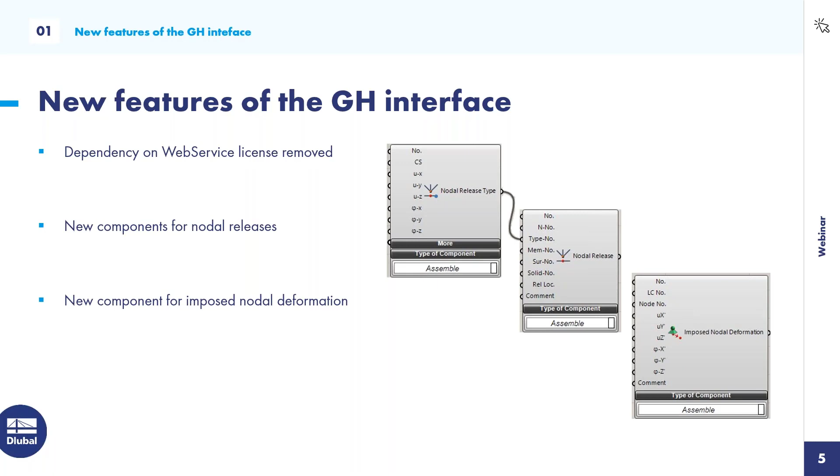What are the new features that we implemented since the last webinar mid-February? A quite important one is we got rid of the dependency on the web service licenses. You no longer need this license to use the Grasshopper interface or Rhino Grasshopper interface. We implemented new components for nodal releases and also a new component for imposed nodal deformations, both requested from our customers.

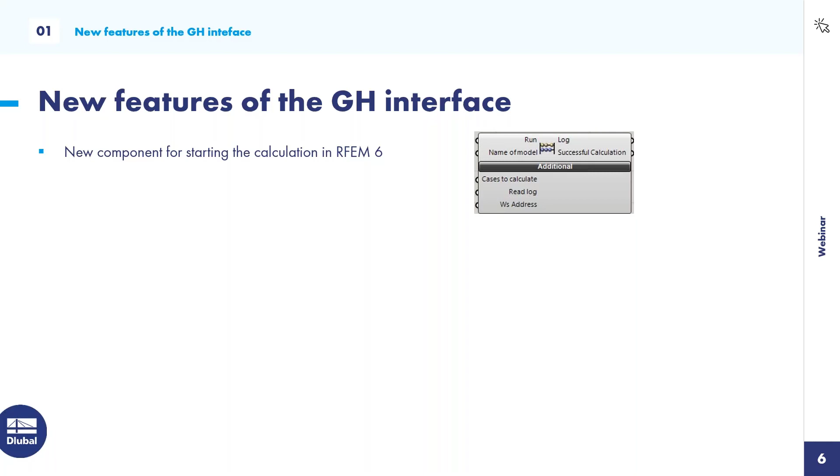Additionally, we created a new component for starting the calculation in RFEM 6. On top of that, also a new component for exporting the results from RFEM to a CSV or XML file. I will mention those two add-ons later in chapter 5. And additionally, we extended the static analysis settings component with the number of iterations, the load increments, and the form finding iterations.

Last two changes, we extended the surface component. You can now control the local axis system as well as the integrated objects via the new inputs here. And we also extended the member component with a simple function, the member rotation via surface. These are the latest developments, and that's already chapter 1. Let's go into chapter 2, where I want to show you how you can use RFEM objects when exporting from Grasshopper to RFEM.

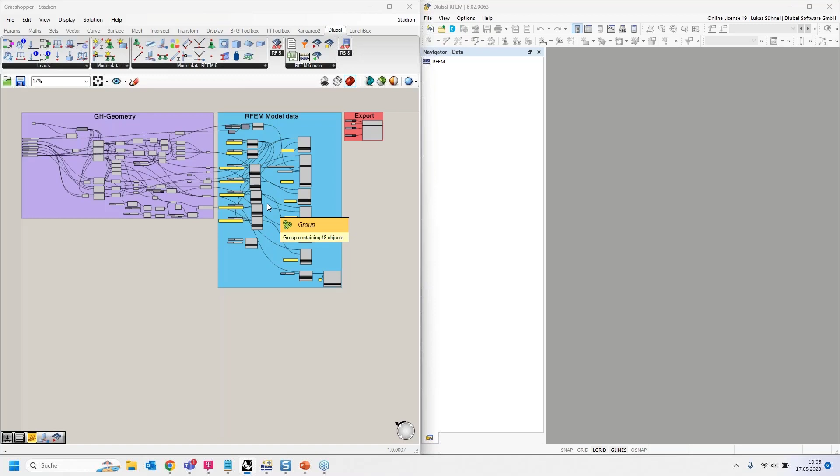So what we need now is, of course, Grasshopper and RFEM. We have RFEM on the right-hand side and Grasshopper on the left-hand side. How do I want to show it? Well, I want to show you first, in really just 1 minute or so, again, how the usual workflow is. Usually you would model a certain geometry via Grasshopper components. With these Grasshopper components, with this algorithm, I created this small stadium here. You may remember it from a previous webinar.

The lines and surfaces from this algorithm will then be connected to our Dlubal components for members and also for surfaces. And in those components, we then can assign the member and surface properties.

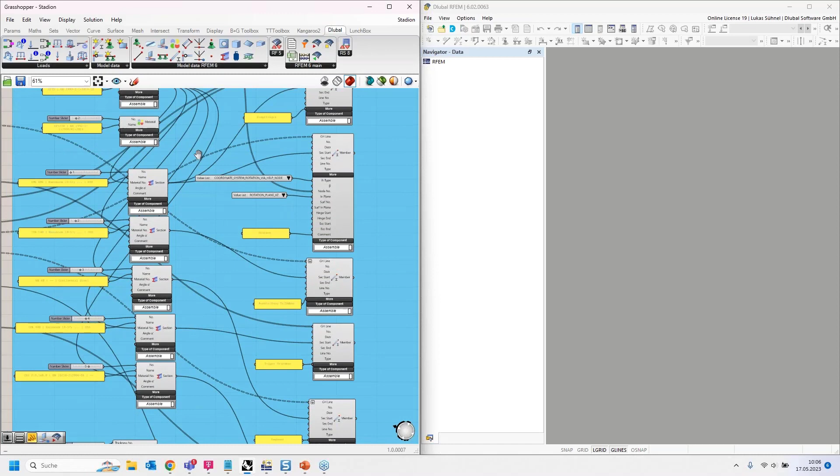Yeah, thickness of the surface, the material, hinges, supports, and so on. To do so, we also need to create this information first. So we need to create the material, we need to create the sections for the members, also the thicknesses. And when we have all this information here, we can send it to the export and create the RFEM structure based on it. This is what I will do now.

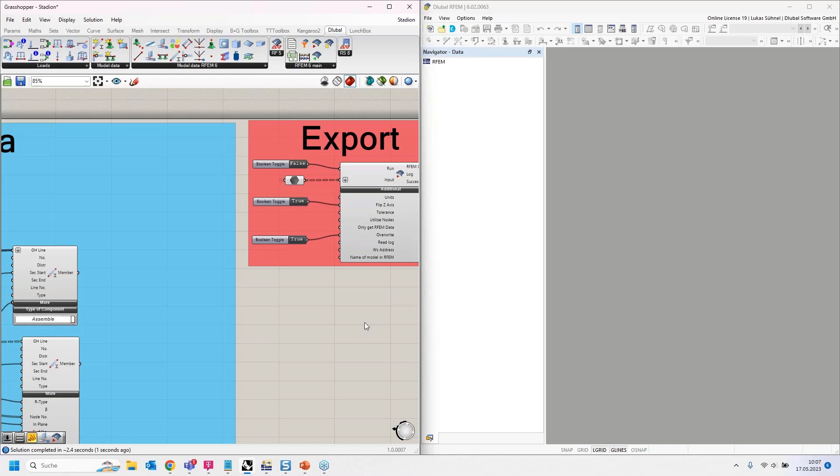This is the workflow that I showed in my previous webinars. Actually, this was not what I meant to do. Small tip: in the past, you had to open an RFEM file when you wanted to export from Grasshopper to RFEM. It had to be opened. This is no longer required. You only have to assign a name here. So if you assign a name of the file that you want to create, then it will be automatically opened, which I did now here. This is a new input basically. And if I run it now, it should work.

Did I? Yeah, just a second. Now it's creating the new file with the same name as I defined it here, and it will transfer the data. All right, the transfer is done, and I can see this stadium, including the section, materials, and so on.

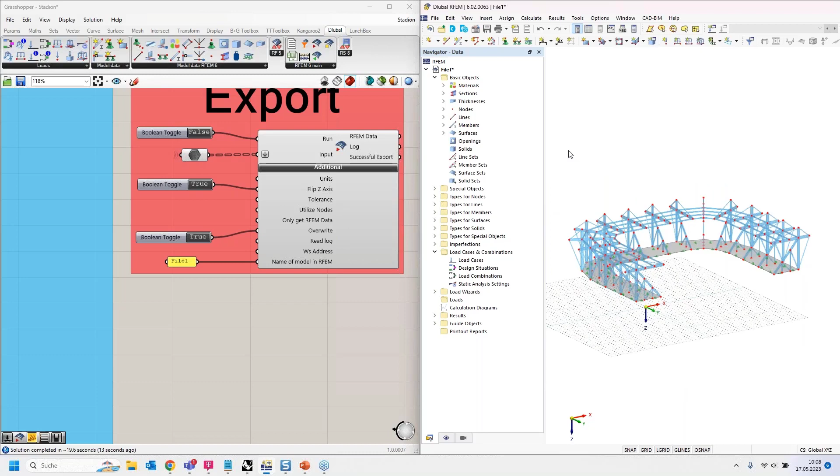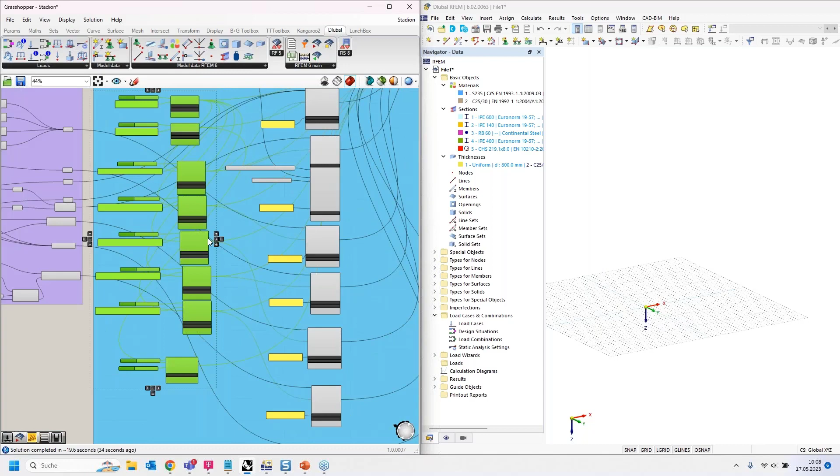All right, so this was the general workflow, and now I want to show you how you can use existing objects in RFEM, for example materials or sections or thicknesses, when modeling something in Grasshopper. What you can do is the following. I will just show it this way. I will get rid of the sections, the materials, and so on components. I don't want to define them now. I will only use my member and surface components.

So if I want to create a member in RFEM now, I have to link it to the Grasshopper line as I did before. I can give it a name, doesn't matter in this case. And of course, I have to define the section for this member. Now, because I do not want to use the section component, I have to assign it differently. And I can do it by defining the index number of the section in RFEM. I have here now a small number slider, and I can assign the index number that we have here in front to this input. So the main beam of my stadium should be cross-section index number 1, which is an IPE 600.

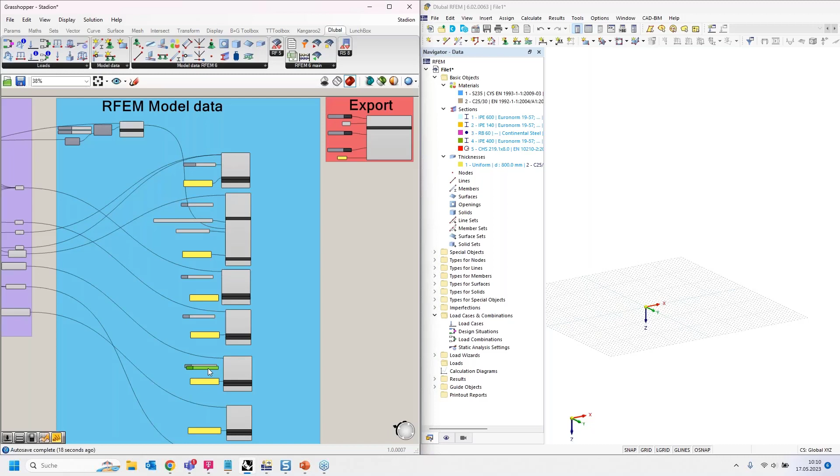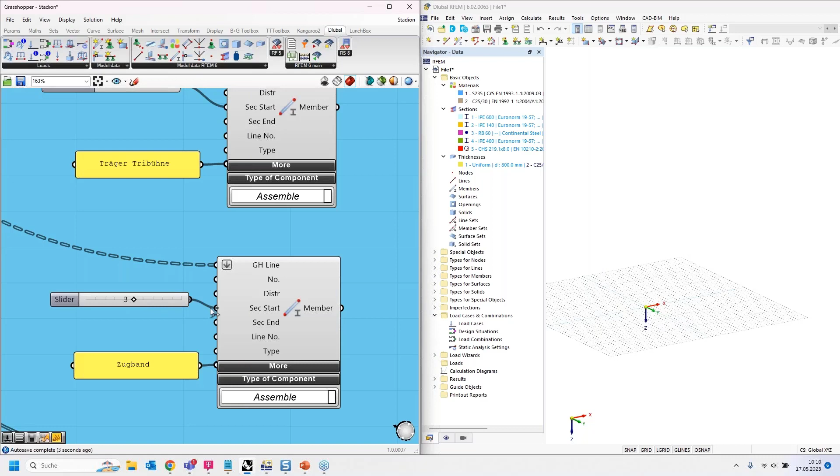And I will quickly do it for all the member components. Just a second. We will assign the right index numbers. For the columns, I want to use the same section. For different beams, section number 2, the IPE 140. Then I want to use also the IPE 400. For the cables, section number 3, this RB round bar 60. And for the coupling members in my roof, section number 4, actually 5.

All right, same logic applies to my surface component. I have to assign a thickness here, and it should be index number 1. So far regarding that, I think it's quite easy to understand. You simply have to assign the index number of the object that you have in RFEM.

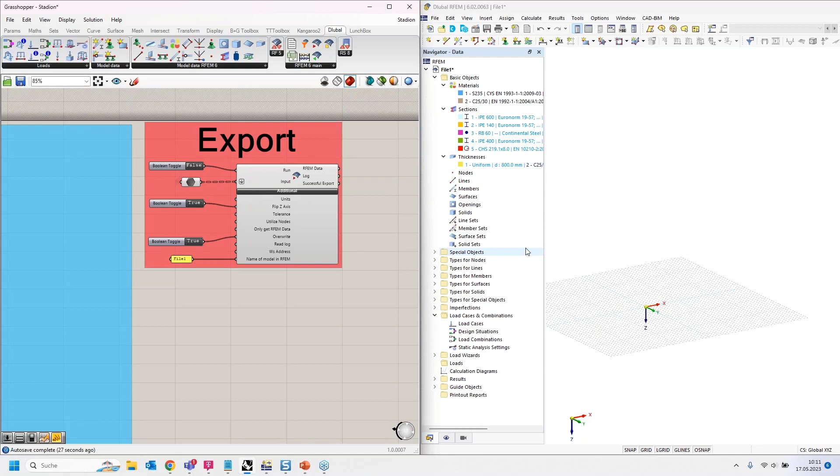Now, regarding the export, we have to take care of something, because we can no longer set the override function to true. Because if I override now and run the export, it will remove all this information and then write it again into this file. But then the index number is not connected to any object here. So this is not how it's working. So I have to set the override to false. And now we do not override, we add information to the existing structure in RFEM. Let me run the export.

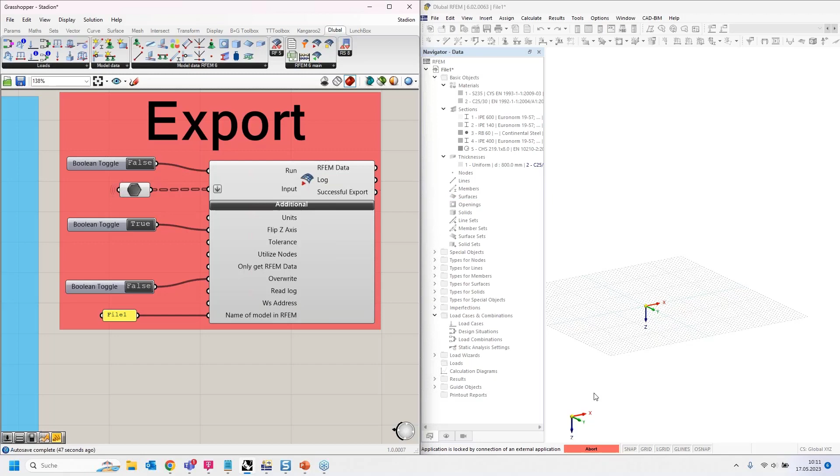There we are. Wait. Okay. Now we have the same structure as before, all the cross sections, all the members and surfaces with the right cross sections. So this workflow is also working. I skipped the part of the definition of all these materials and sections and thicknesses in Grasshopper.

What I have to be careful about now is that I can run this export only once in that way. I have 252 beams now, and if I would now run it again, or modify it slightly and run it again, I still cannot use the override function. I have to use add, but if I add the same thing again, I will double the amount of objects that I have. So we can wait a second and then we can see the result. All right. So we have, instead of 252, now 504 beams.

So this means this add functionality only works once. Anyway, you can use it, and you can use it in a way that you, for example, create the materials, the sections, all the objects that you want to have in your RFEM file once, then you save it in a template. And then you can create new files using this template, run the export with the add functionality.

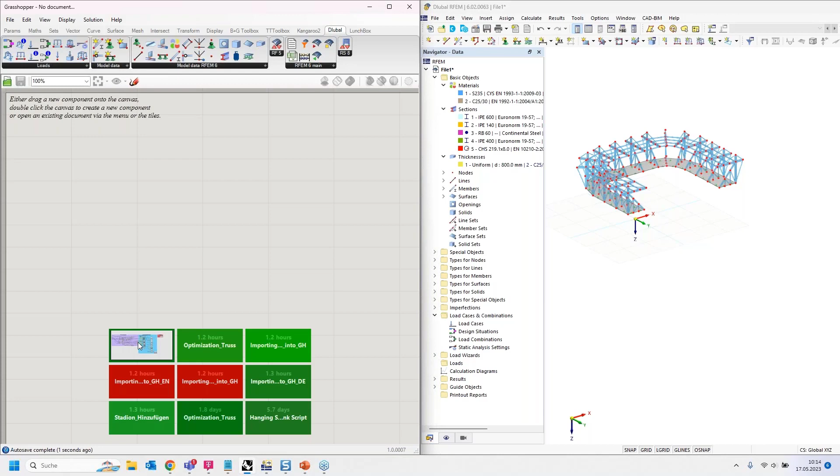Now, I want to add something to that, and therefore I want to open the original file again, where I defined sections and everything, and I will remove the member components and also most of the section components. I will only use the material component. I get rid of the index number for now. And what I want to show now is that you can also modify existing objects in RFEM. How can you do it?

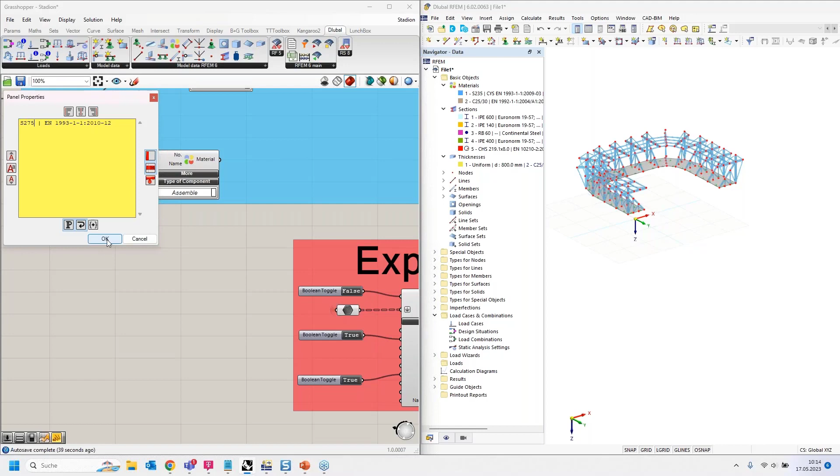Well, let's imagine we want to use a different material than the S235. Let's say it should be an S275. I have to switch it back to false, of course, otherwise I would remove everything and export just one material. But my goal is to modify the first material. It should not be S235, it should be S275. If I run it like this without the index number, I will only export a new material.

So this add functionality works in a way that when there is already something defined, it will create this new object on the end of the list, as we can see it here now. Again, this was not the goal. My goal was to modify material number 1. So to modify something, you have to assign the index number of the object and then you can modify it as you wish. So if I run the export now, I will modify index number 1, and it will

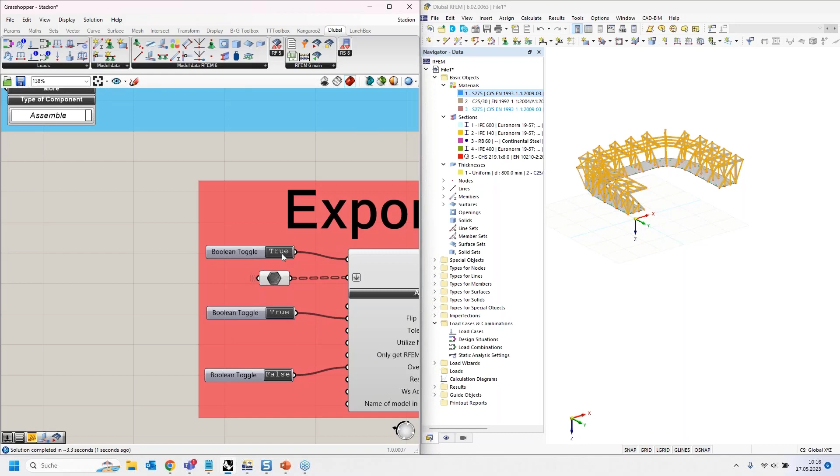modify the information. So let's do it again. I run the export, and you should see now that it switches. Is it already done? Wait, it's already 275. Did I already do it? I got a call and was a bit distracted. So let's do it again, 235, let's say, just to see it.

So I want to change this from S275 to 235. I run it again, and you can see the change. All right. So you can also modify objects if you assign the index number to the object, use this add functionality, and then modify the structure. This also works with all the components. I showed it only for the materials now because it's quite easy to show it with that, but you can use it everywhere. And I will show it again in chapter number 4. All right, so far regarding chapter 2.

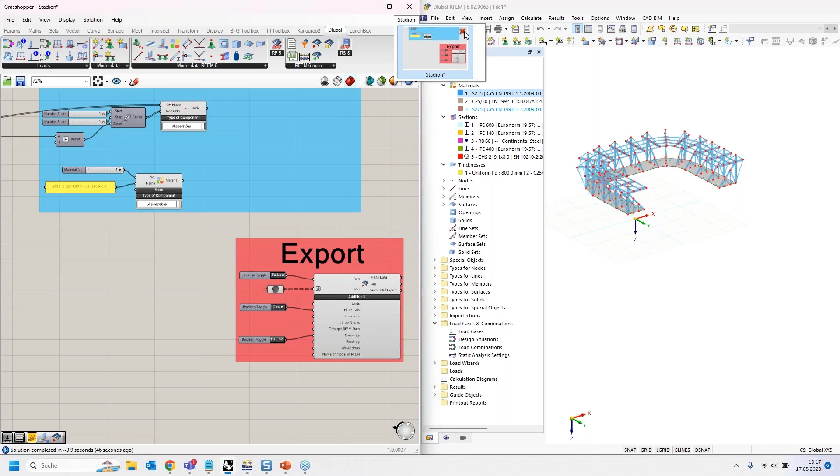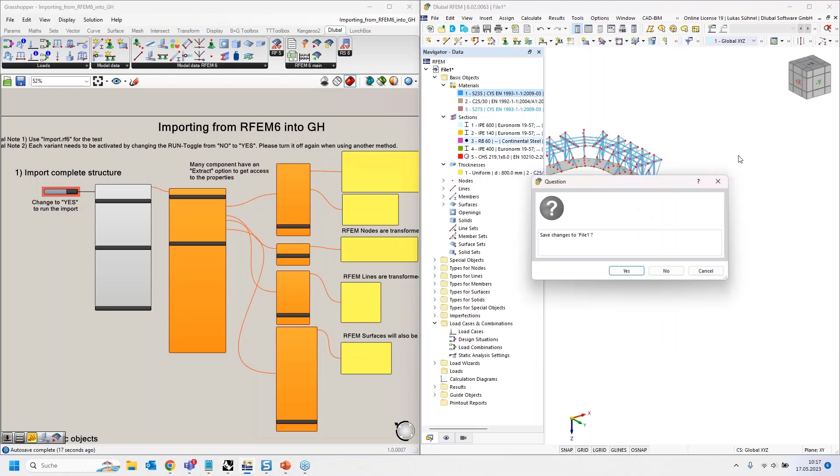Let's switch to chapter number 3 of today's presentation. I want to show you how you can import data from RFEM into Grasshopper. Therefore, I will open a different file, importing into Grasshopper, and this file has various algorithms inside, alternative algorithms, which I will explain in the next minutes. To show the import, I will use a different file, and this should be this one.

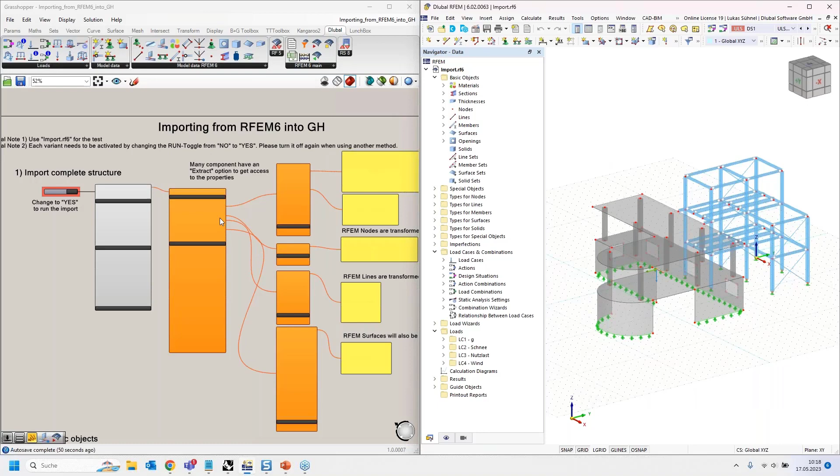All right, what do we have here? We have here a mixed structure, a small concrete building, small steel structure. Behind that, the concrete building has some openings inside. Now, how could we import this information into Grasshopper? It's actually quite easy. Instead of using the RFEM6 export component, we have also an RFEM6 import component, which is this one here. You can run the import simply by using this Boolean toggle. You can set it to true, and it will read the data into Grasshopper.

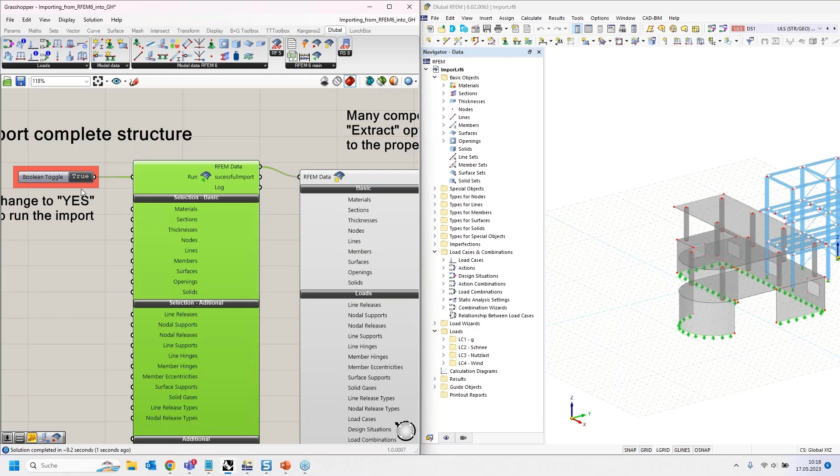Let's do it. I will run the import. And it's done. I will leave it as true, otherwise my information will be lost again. And now you can see what we imported. We imported the RFEM data, and this is an RFEM data package. You can't do anything with this right now. You have to split it up into each object, and this can be done by using the RFEM data component, which is this one here. So you can connect the RFEM data with the RFEM data component, and this component will split it up into materials, sections, thickness, so basically all the objects.

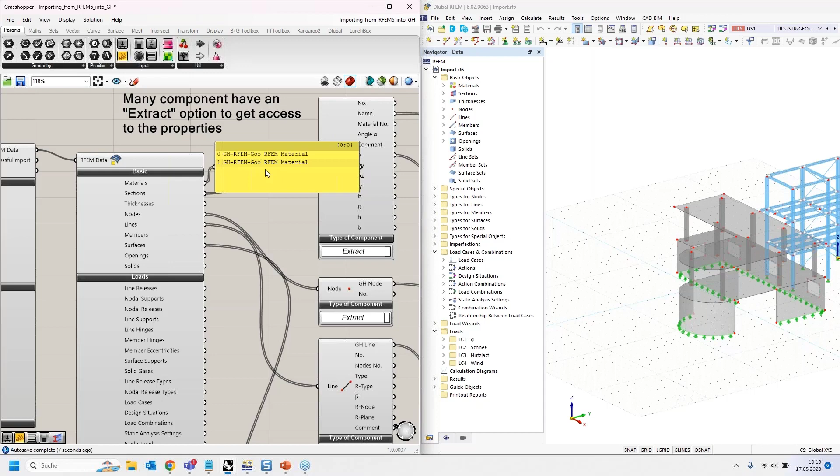If you analyze the output of those components, it's again a cryptic object package which you cannot read directly, so you have to split it up again. Splitting it up can be done by using the regular section component, the node component, and so on, by simply using the regular component that you have in the list.

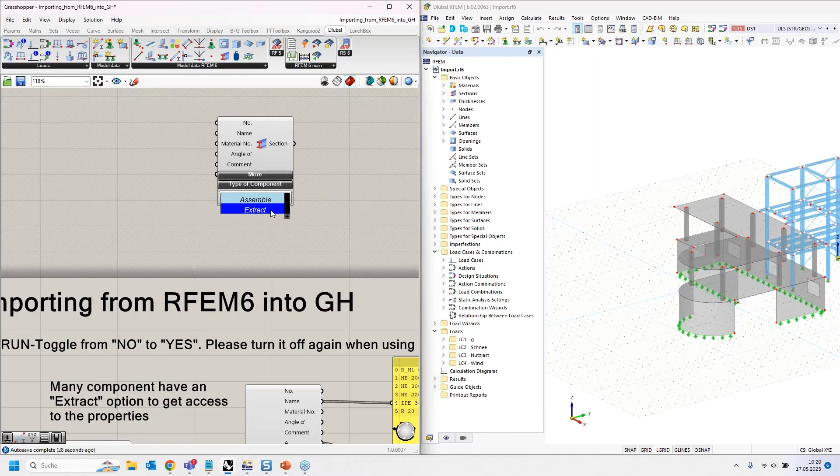And you can switch it from assemble to extract. So you get the section data package, and it will be split up into all the properties of the section. This is what I did here. All the section, node, line, and surface components have the extract option. You can now read the information from that package, like the name of the sections used in this project, and also the area of the sections in SI units, square meters.

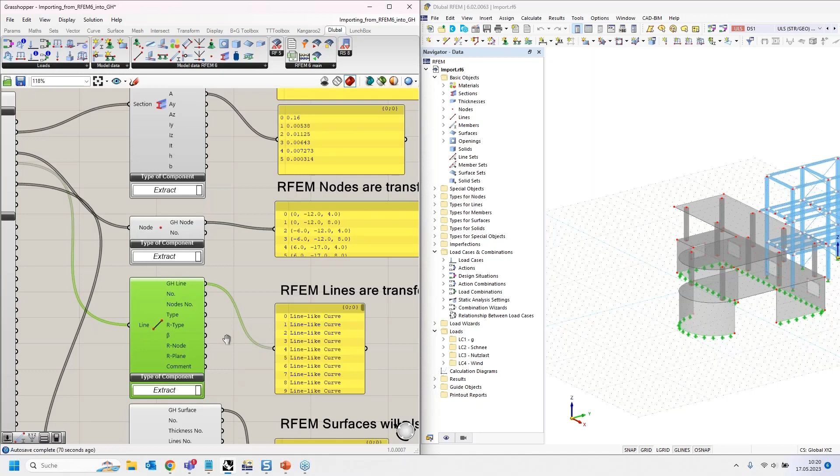Regarding the node component, you get real Grasshopper nodes out of it. From the line component, you get Grasshopper lines. And from the surface component, you get Grasshopper surfaces. So this also results in this picture, or this graphic.

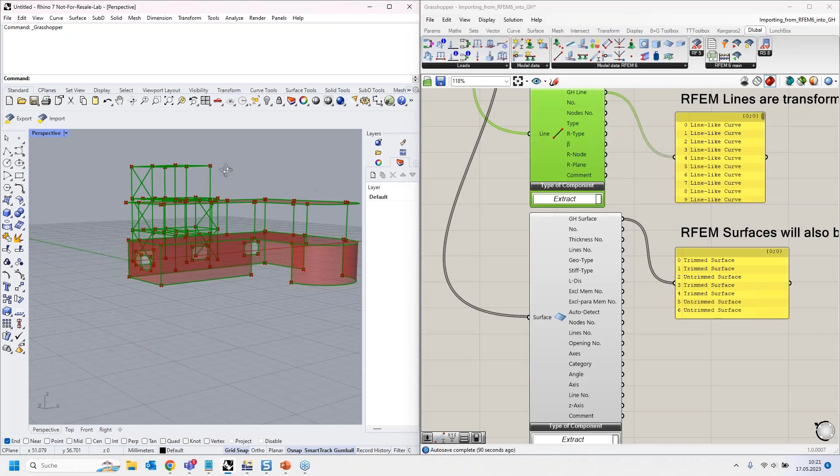This is what we import now. Rhino serves as a viewer for Grasshopper information, and this is what we imported: the surfaces, the lines, and the nodes, including the openings. What we cannot do yet, this might be a question, is render the beam cross sections in the analytical model. This is a feature we want to implement in the future.

So far so clear, I think it's straightforward. Import component, split it up in the data component, and then depending on which object you want to analyze, use the extract function and you get the information that you want.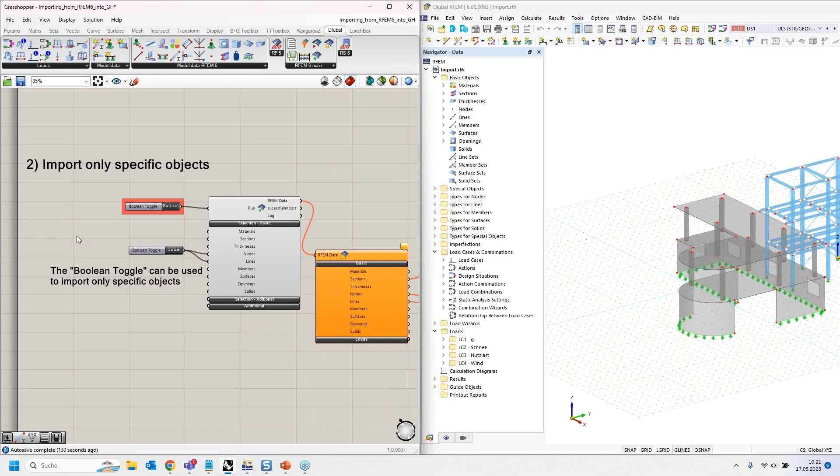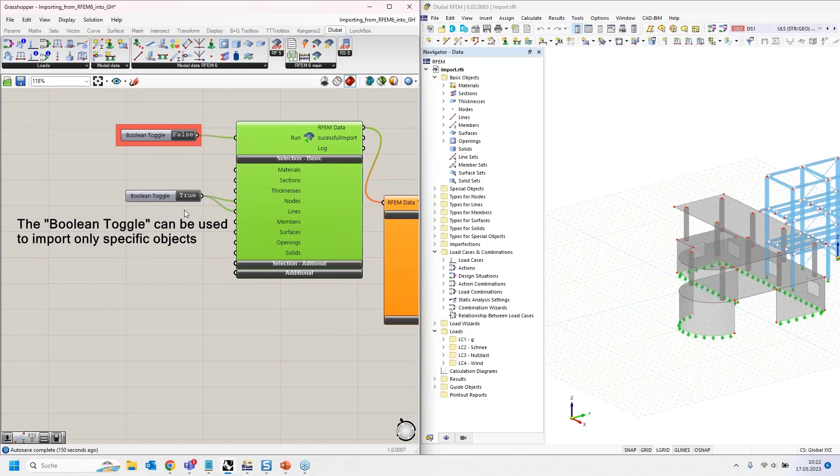How else can we modify the import? Again, I have a regular import component here, but this time I only want to import specific objects, not all the information. This might take a long time in case of bigger structures. If you only need, for example, the nodes or the lines, you can use a Boolean toggle, set it to true, and say just give me nodes and lines.

Let's do it quickly. I run the import, split the data package up again, and now use the nodes and the lines. You can see the result: we get the Grasshopper nodes, we get the Grasshopper lines, but we do not get the sections. It's a red line, orange line, because I did not import it. So quite clear what happens here.

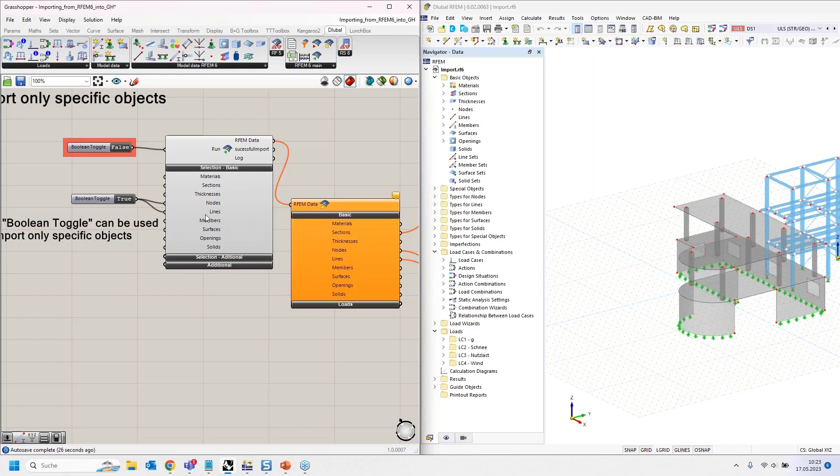We can also import only specific objects, so this is a rough filtering of what we want to import. We can either say nodes yes or no, lines yes or no. But let's say you only want to import specific nodes and specific lines. We also have an option for that, the so-called filter component.

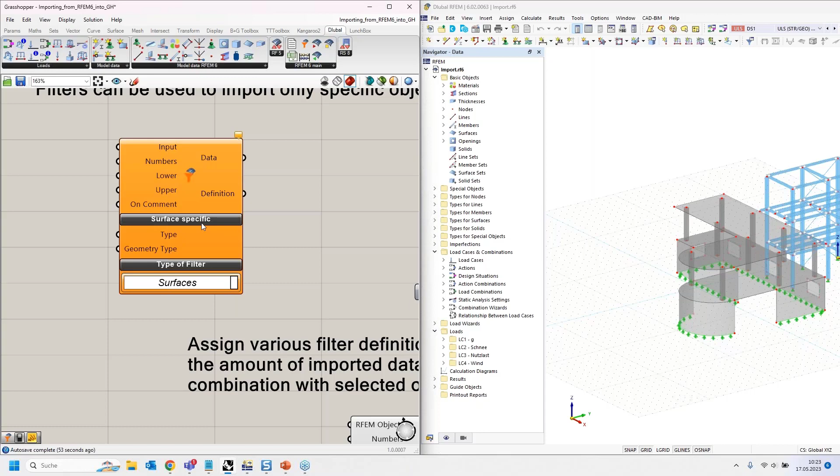This filter component has a general look, but you can also use a specific subtype of this filter component for nodes, lines, and surfaces. Then it will have additional options, and you can define in this filter what you want to import.

For example, for the nodes, I want to import all the nodes with an x coordinate between 2 and 6 meters and a z coordinate between 11 and 13 meters. And for this surface filter, I want to import only the quadrangular surfaces. Then you can connect the filter definition with the filter input of our regular RFEM import component.

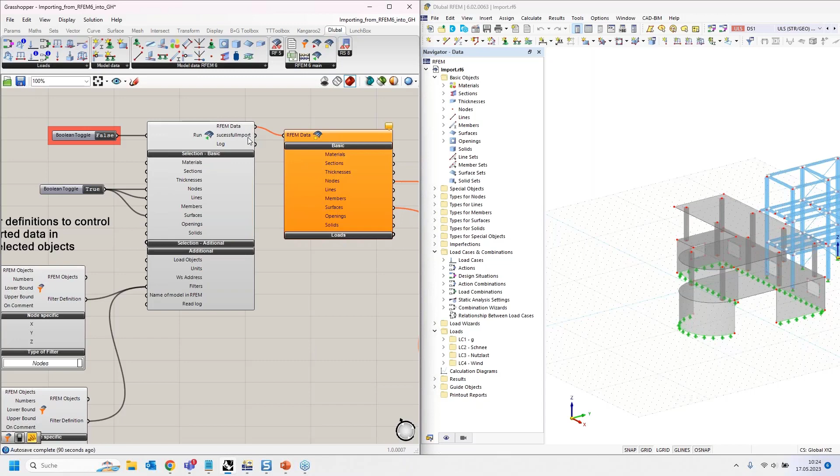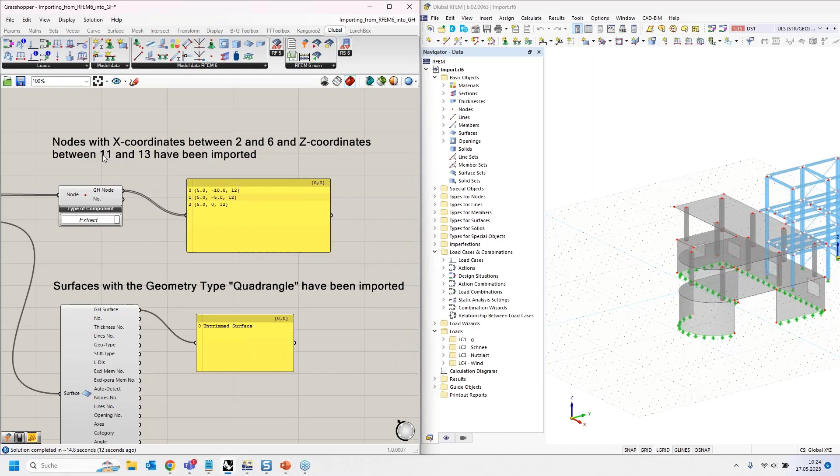And then the usual workflow: splitting it up, extracting the data. Let's try it. So we get now 3 Grasshopper nodes. Again, the x coordinate should be between 2 and 6, and the z between 11 and 13, which is fulfilled for these nodes. We got 1 surface with the type quadrangular, can only be this one.

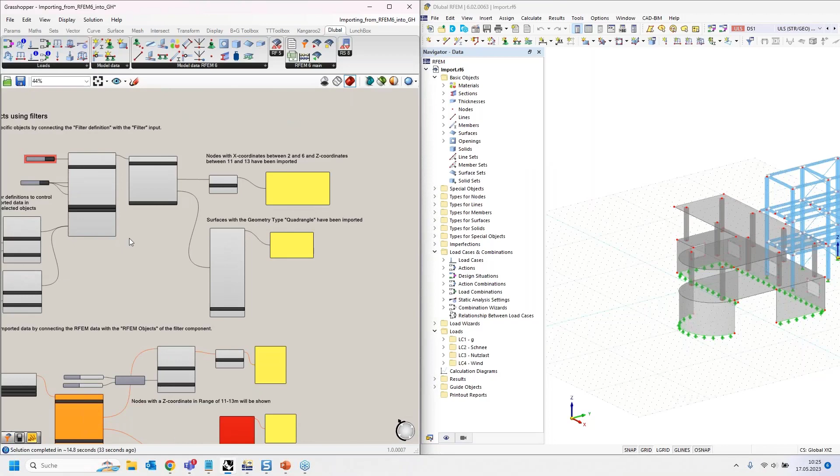And we can also double check it by having a look at the Rhino viewer: 3 nodes and the quadrangular surface. So this could be an option, the filters can be used to import only very specific data into Grasshopper. The filters can also be used differently, not before the import, they can also be used afterwards.

This is what I show in this small algorithm. Again, regular import component, we split the data up via the RFEM data component. And before we extract the information from all nodes, we use the filters afterwards, basically. Let's again quickly run the import, then we can also see the result directly.

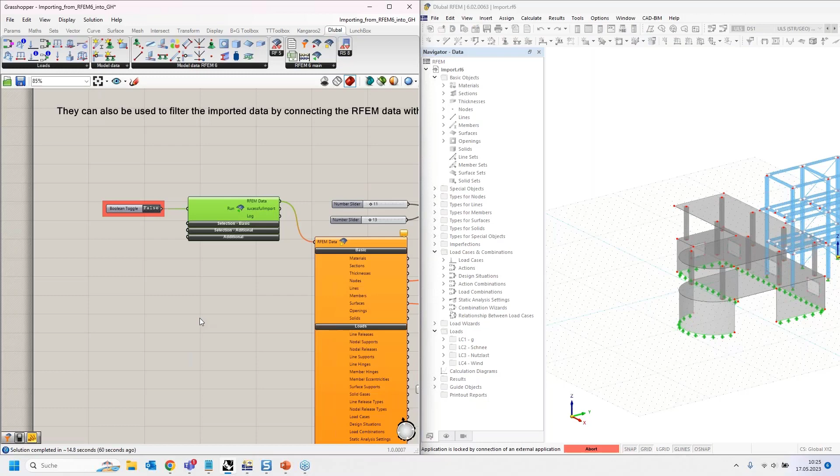All right, so I'm extracting now, or I plan to extract the information from my nodes, but only from specific nodes. Here I have 100 imported nodes.

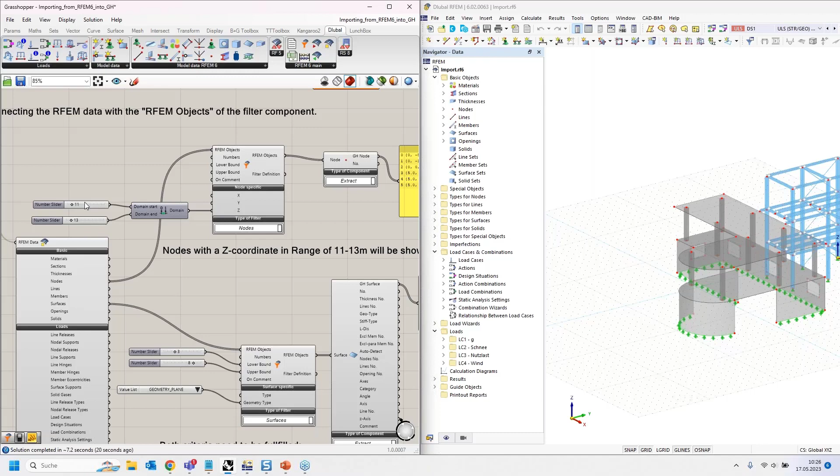With the filter, I filter most of them out. I only want the nodes with Z coordinate between 11 and 13 meters. This results in those 6 nodes, basically the ones here on top.

Same for surfaces. I can say I only want to import the surface index numbers between 3 and 8. And additionally, so this is an add, only surfaces with the geometry type plane.

Surfaces with index number 3 to 8, well, we don't have 8, but never mind, we have 3 to 7. This would be all those surfaces now, but only geometry should be plane, so not the quadrangular surface. So these are the surfaces that I want to import.

If you can quickly double check this, you can see it here, the 6 nodes and the 4 surfaces.

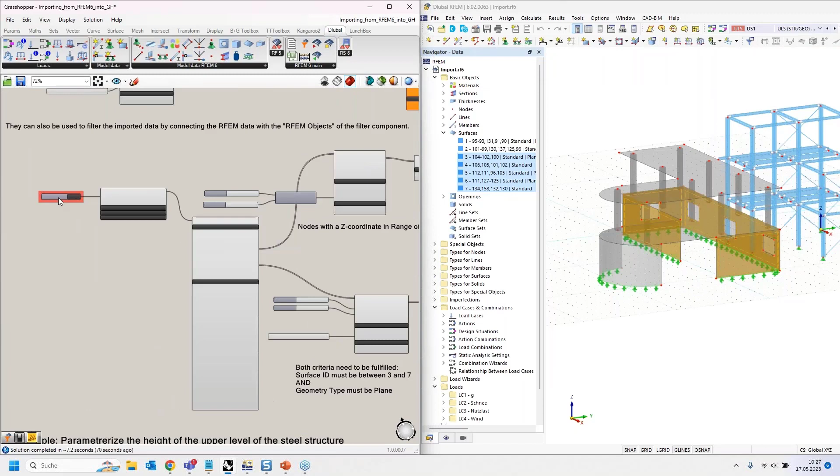So far regarding this, I think the import of objects from RFEM into Grasshopper is quite clear. You can use the Boolean toggle in general to control the amount of data, and the filters to really specify the information.

Now, if you think of the chapter before where we modified an RFEM structure, we can combine both options now. We can combine the import from RFEM and the modification that we did before.

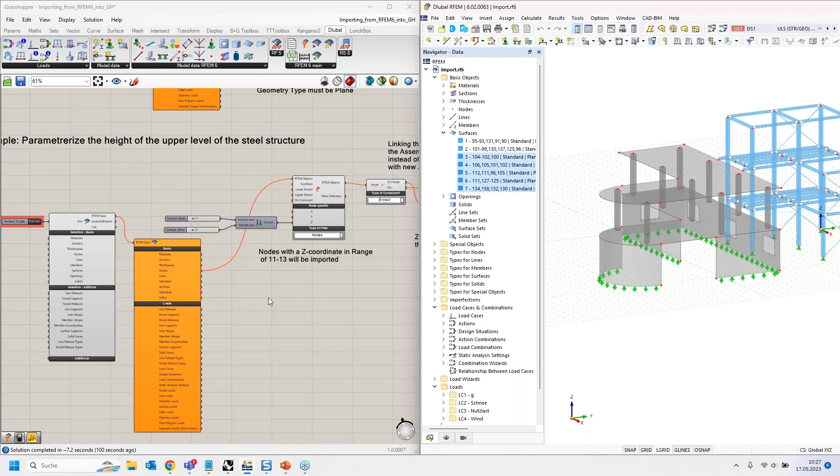So what I plan to do here is now, in this last algorithm from this file, I want to parameterize the height of the upper level of the steel structures. Maybe not the most realistic example, but I think for showing the functionality, it's good enough.

So what I plan to do is import these RFEM nodes from the upper level of the steel structure. I want to make the Z coordinate of those nodes parametric, then modify it and export it back to RFEM to modify my RFEM structure.

How can I do it? Well, first of all, again, I have to import my RFEM data with the import component. I split it up, let me maybe...

Then before I extract the node information, I will filter the nodes out that I want to modify. So again, the nodes with the Z coordinate between 11 and 13.

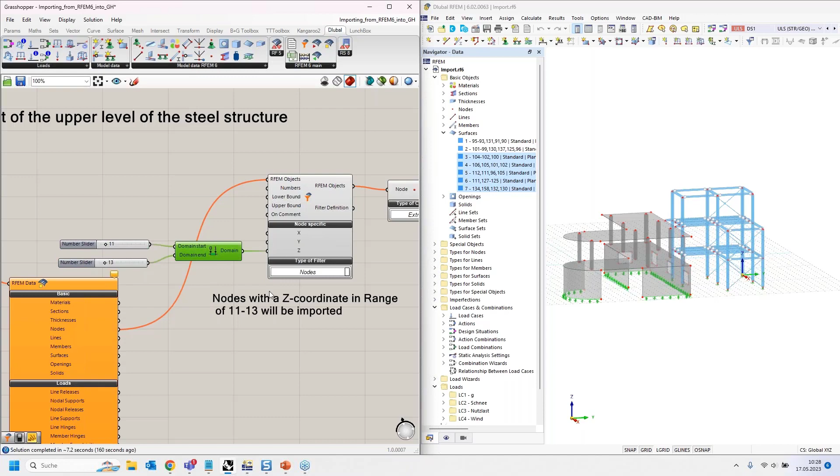And then I get the node package, which I can extract using the node extract functionality, and I get my Grasshopper nodes out of it.

Now these Grasshopper nodes can then be deconstructed. I get the X, Y, and Z coordinates from those nodes, and I can create new Grasshopper nodes or points using the construct point component.

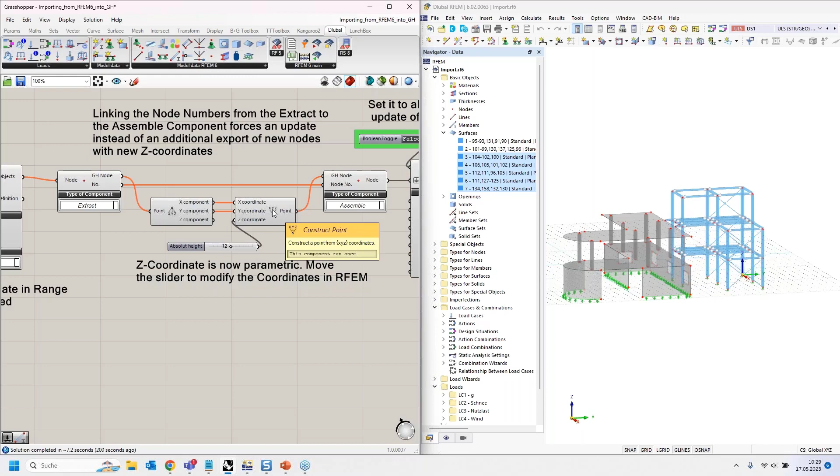I will link the X and Y coordinates, should be similar, but I want to vary the Z coordinate. And those new points or new nodes are the input for a new node component.

This time assemble and not extract. So I will create new RFEM nodes using this parametric construct point component. Let's have a quick look how this looks.

If we run the import first, all right, so we get the RFEM objects, the 6 nodes, we split them up into these 6 Grasshopper nodes.

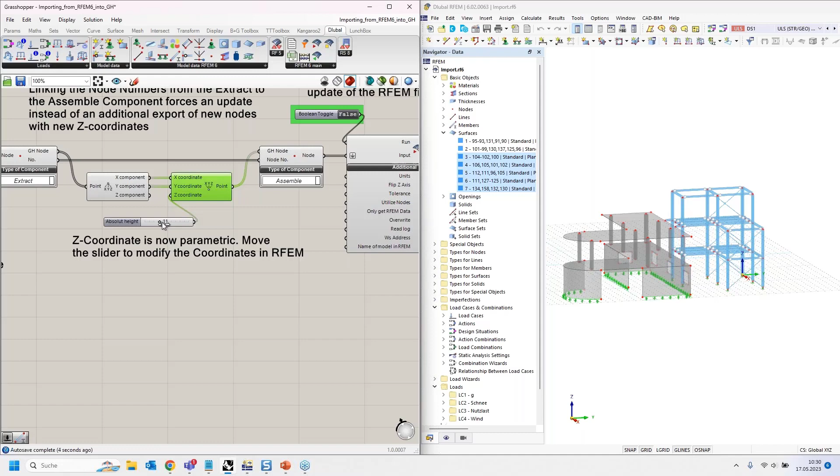And then I have here these 6 new nodes where I can modify the coordinates. Let's say 11, for example. Okay, now if I want to modify the RFEM structure that I have here, I have to set the...

...overwrite to false. By default, it's false. So basically, you wouldn't have to do what I do now.

I just want to show it so you are aware again of this feature. Overwrite should be false because I don't want to override my nodes, I basically want to modify them.

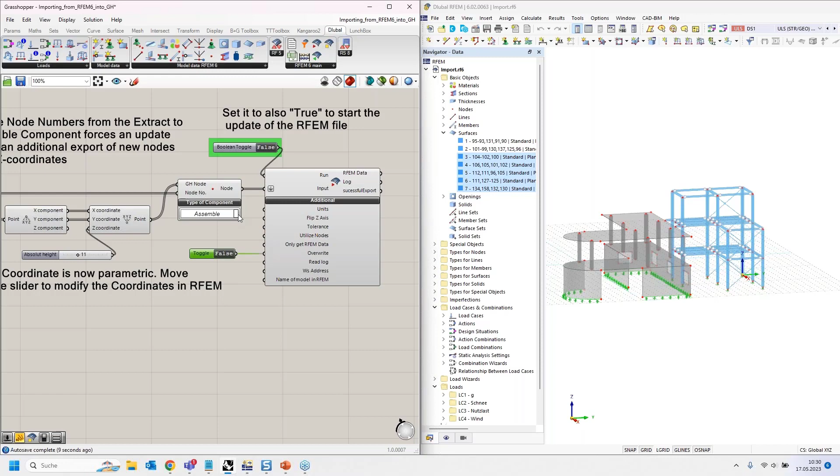So this is clear, false. But if I would only have these new nodes from this component into my node component without the node numbers assigned to it, then I would simply create new nodes with Z coordinate equal to 11. So theoretically, I would add new nodes with a Z coordinate 11.

So what I have to do to modify the existing nodes, I have to take the index number from these nodes that I imported and set them as input as the index number for the basically newly generated nodes.

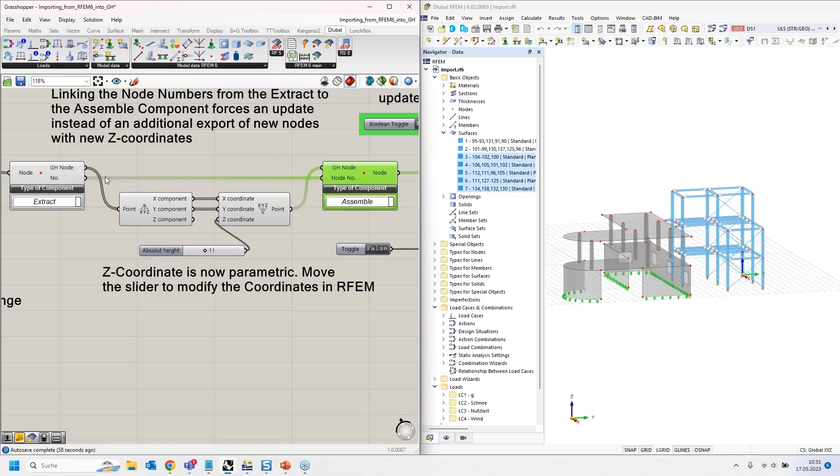So I simply link the index numbers from my import component or extract node component to my assemble component. Then I have a new export component, regular export component, as you saw before, and I can run the export now.

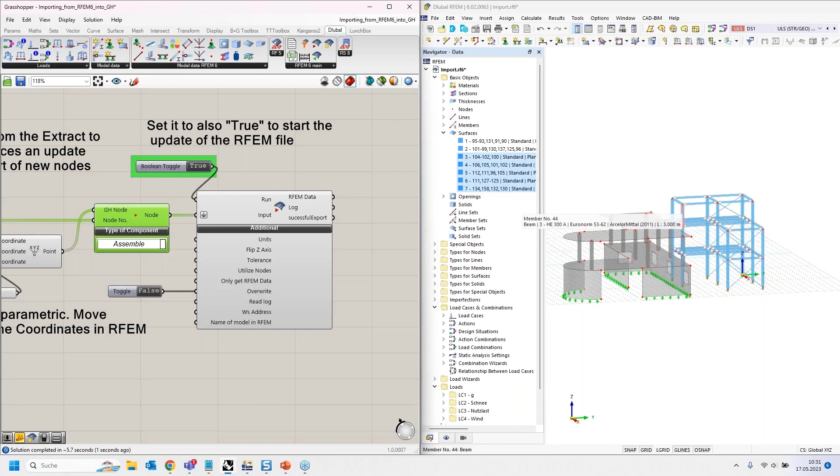And you should see that these nodes will be modified. Yeah, you can see they now have the Z coordinate 11. And now I can leave this on true and modify my structure or modify the Z coordinates, and it will automatically update these coordinates.

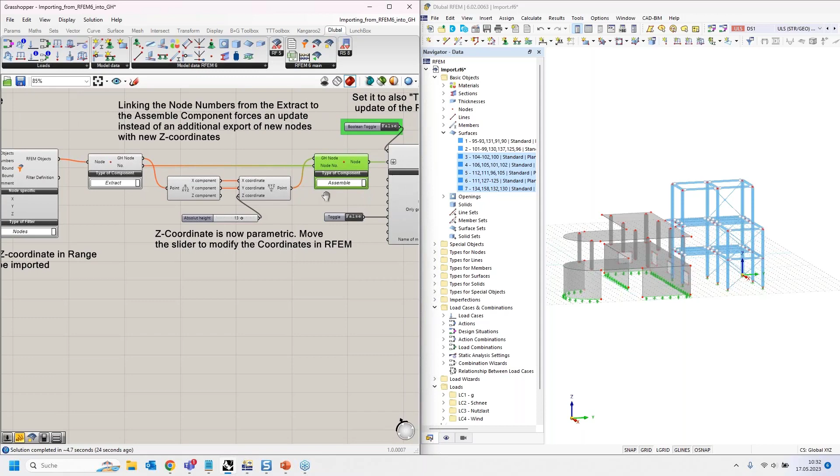All right, I think the behavior is clear. You can import the objects that you want to modify via the import component, make this part of the object parametric or change it however you want, and then link the index number of the imported objects to the new objects and run the export having the override as false. This is the workflow to modify existing RFEM structures. All right, so far regarding chapter 4 already.

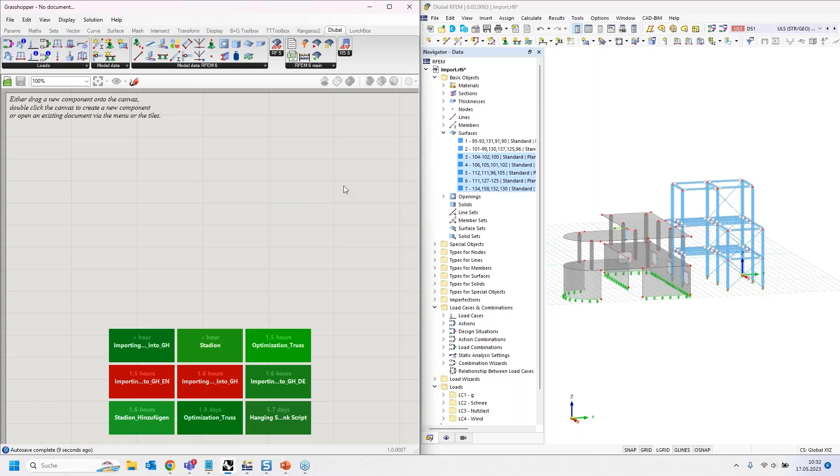And now I want to present the last chapter, the first steps of an automatic calculation loop using Galapagos. To do so, I will close this file here and open a new Grasshopper file. Let me briefly explain what I have here.

I have here a simple truss, nothing specific. For the truss, I'm using the Lunchbox plugin in Grasshopper, where I simply have to define the dimensions of this truss, and then I get all the lines, the beams, the diagonals, and so on. Those lines I then connect to my member components down here. Before that, I will also create some sections and materials. So, straightforward what we did in chapter number 2.

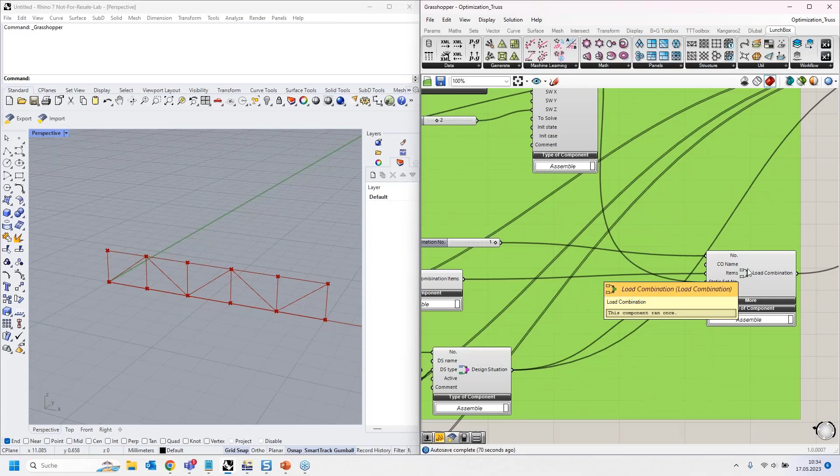I also define a couple of supports on the left bottom, on the right bottom side. And additionally, I create a load case and one load combination, simply to have something that I can calculate afterwards. And then I send it to my export.

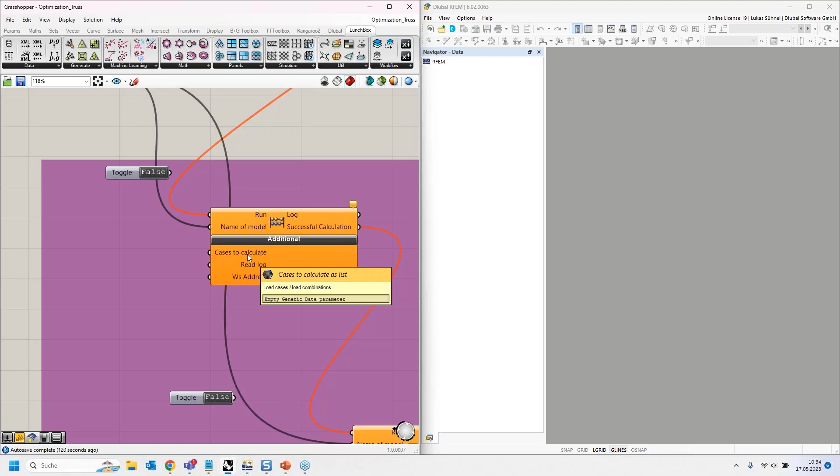So I will create this truss beam in RFEM, assigning a couple of sections to it. The next step that will happen is I will run the calculation in RFEM using this new calculate component. It's quite simple to use. It has a run input, so you can use a Boolean toggle to force the calculation to run, or not. The name can be assigned, which I can modify, and you can assign the cases that you want to calculate. I left it out, so basically I will calculate all, but you could link your load combination, for example, into the cases to calculate, then only the load combinations will be calculated.

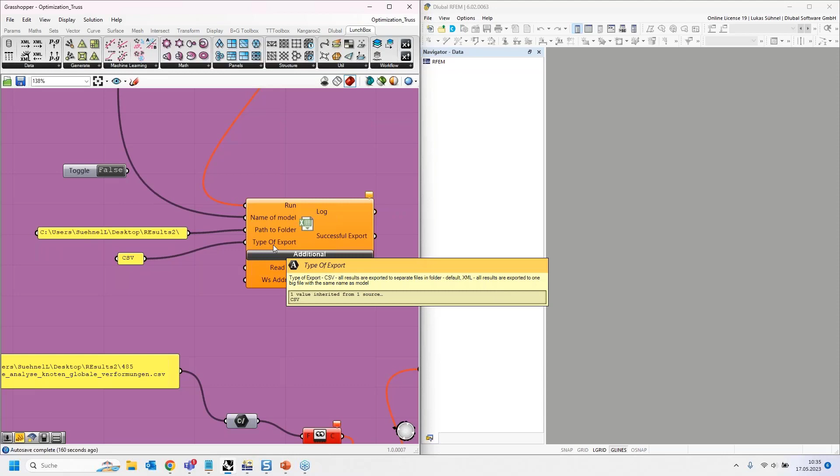Additionally, I have here this export result component, also new, as I said. This will export the results that you get in RFEM into a CSV or XML file. You can assign the name again. You have to assign the path to the folder where you want to export the results into, a simple path via string. And the type of the export can again be defined via a simple text box, basically CSV or XML. This is what you have to define here.

All right, and the speciality on those components is that you can run it depending if the previous component was successful. So my first step is that I will export the data, model data, from Grasshopper to RFEM. If that was successful, it will give us here the information true, it was successful. And with this information true, it will run the calculate component. You don't have to do it manually, it can be done automatically. And if the calculation was successful, we get again a true, and we can link it to the export component. And then it will export the results.

So let's do it for now. This is all, and I will just change the name. File 2, maybe. Okay, and let's run the export, and not only the export, hopefully also the calculation and the export of the results.

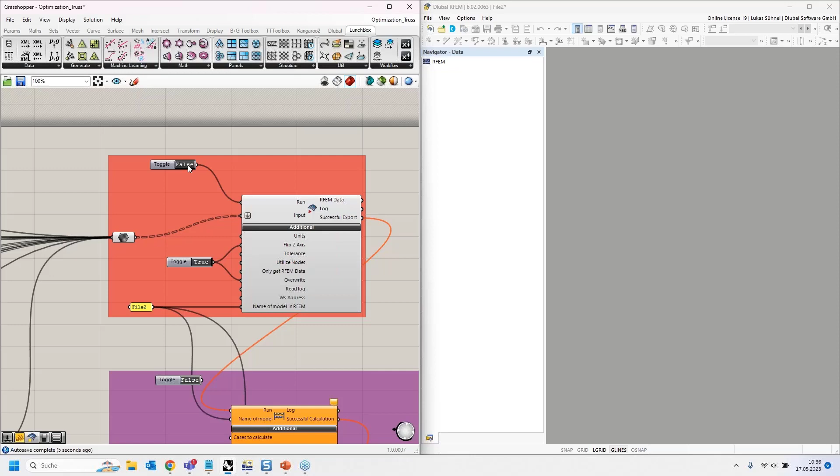So RFEM creates a new file named file 2. It creates the truss here, and you can see it's generating the mesh, it's running the calculation, and now it should also export the results to a CSV file or a couple of CSV files. All right, done. Let's have a look.

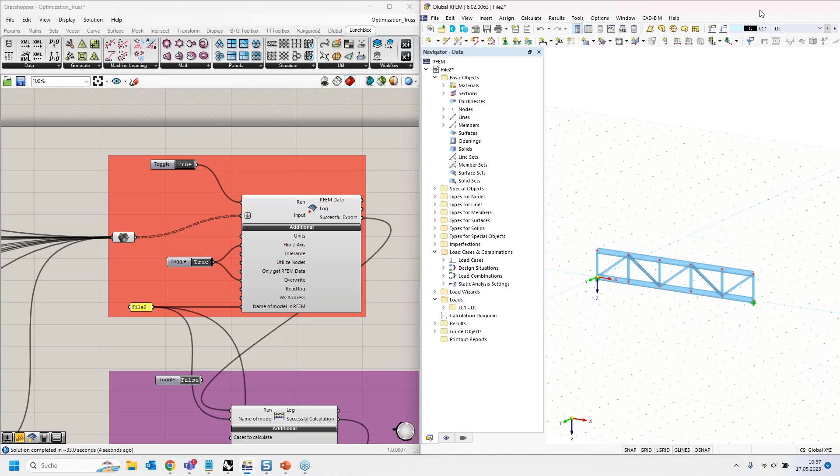Now, what is the next step? So far, so good. We ran the export, we ran the calculation, we exported the results, but how can we make an automated loop out of it? Well, to do so, we would have to read the information from this CSV file into Grasshopper.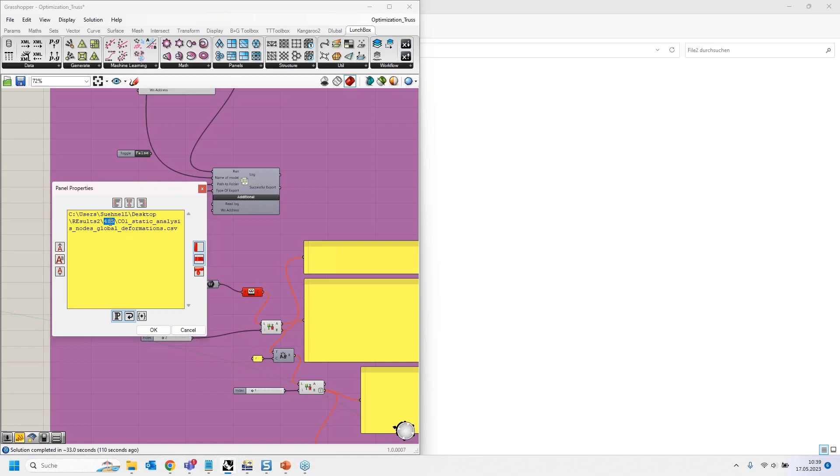And this is possible. Oh, I see I have to modify the name a bit because this is now the English presentation today and not the German one. So let me quickly modify this. .csv, okay. And this is not the file 485, it's file 2. So it should work, yes.

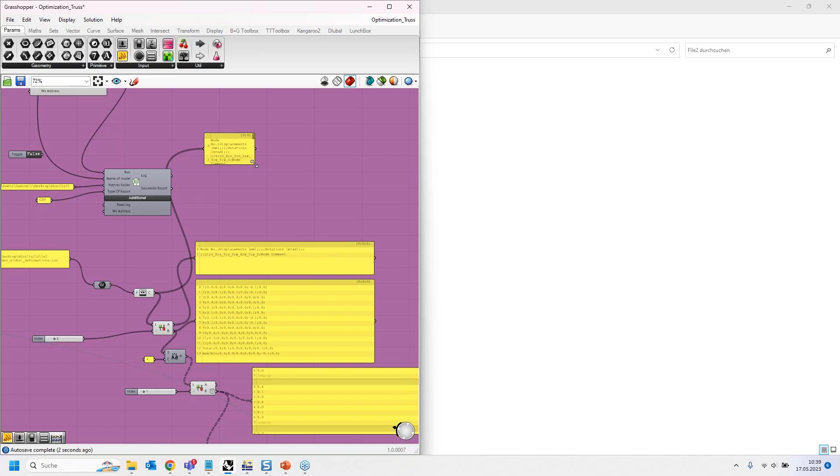So what you can do is the following. You can use this file path component from Grasshopper, and you can link the file path to it. And then there's another component in Grasshopper, read file. So this will simply read all the information from this CSV file. I can quickly display it. Oops. And it looks quite similar to what we had in Excel, yeah? The 2 lines with the header, and then the index number on the left, and then all these result values. To use it properly in Grasshopper, I would need 1 value per line.

So what I will do first is I will get rid of the first 2 lines. I don't care about the header. I know which value I want to use. So I'm using a split list component here, and I split the list with the index number 2. So I have now 1 list with the header, which I don't care about, and 1 list with all the remaining information from the CSV file.

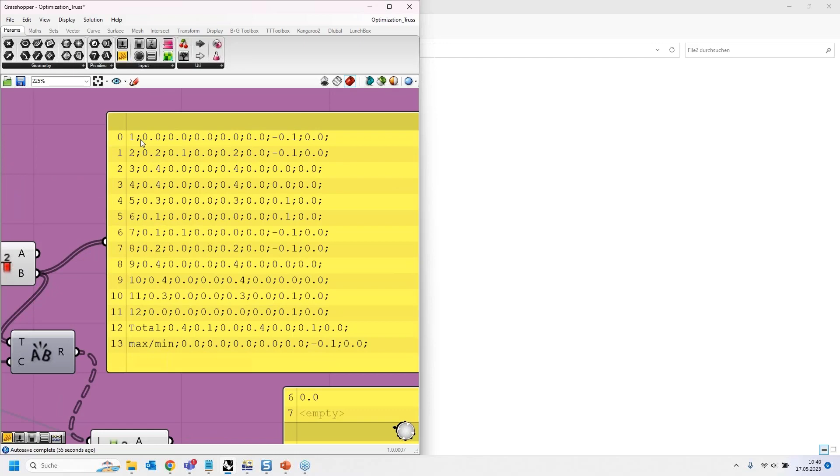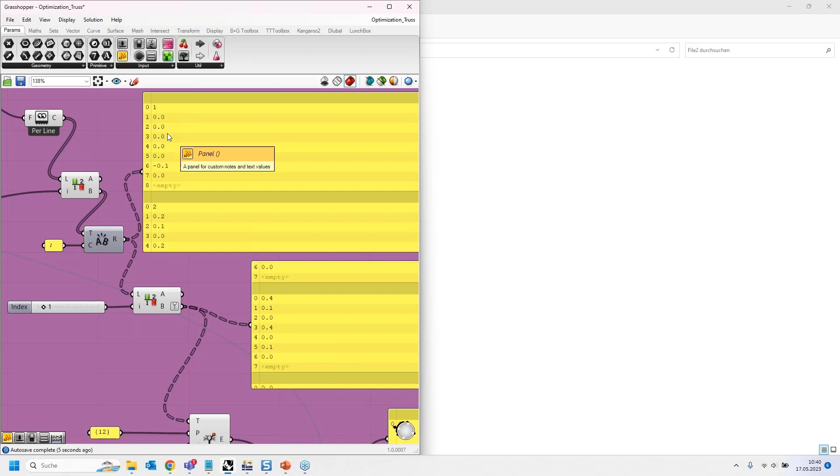Now, as I said, I want to have 1 value per line and not multiple values in 1 line. So I can split the text. I can use this text split component. My trigger, let's say, is this semicolon, and then, see it here, it will give me for each line one value, which is already quite nice. The first value, however, is always the index number, which I don't care about. So I use a split list component where I get rid of the index number, and then the remaining list is this one here, where it shows me only the deformation values.

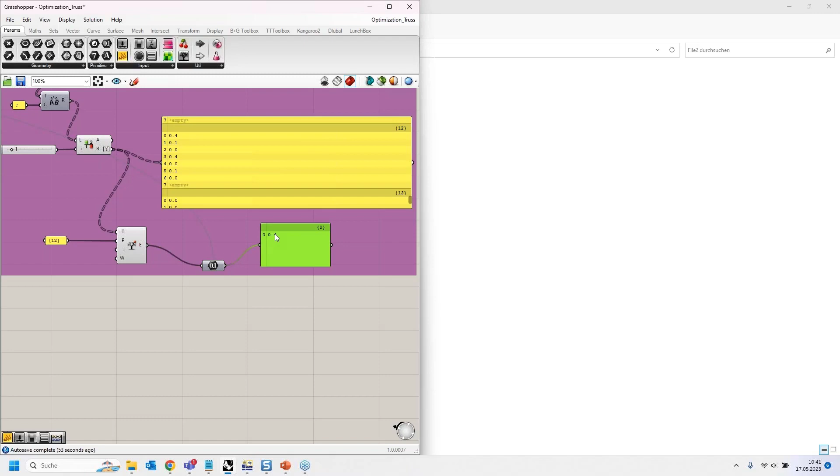And I want to pick one specific value from this list using the tree item component. I want to use from this branch number 12 the index number 0. I want to grab this 0.4 millimeter as value, which is defined here, and this is then the value. You can see it. All right. So this value I want to optimize. I want to basically optimize the deformation of my truss.

And how can I do it? Well, this is where I used Galapagos as a first try, and I have to highlight first try because this whole workflow is quite new for us because we just recently implemented the calculate and the export result component. So we are making steps in the direction of this automatic calculation loop. Galapagos works roughly in a way that you can define the value that should be optimized via the fitness. So you would link the fitness to this value, and the genome is then the parameters that you allow this component to modify.

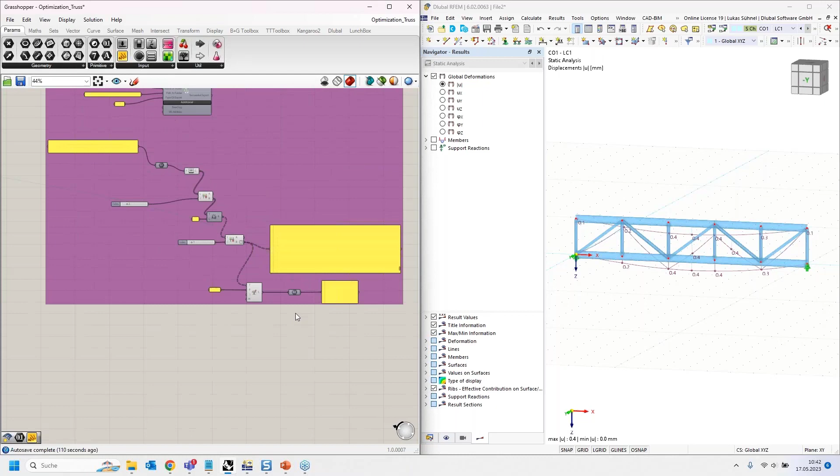And I made it quite simple. Again, I have here this component. The fitness is this deformation value that I just extracted from my CSV file. And the variable that I allow this plugin to modify in this case is the height of the truss. So the height of the truss is this number slider. This should be modified, and then we can run the automatic calculation loop. Let me quickly look. I want to minimize the fitness, so basically minimize the deformation, and this plugin should search for the best result.

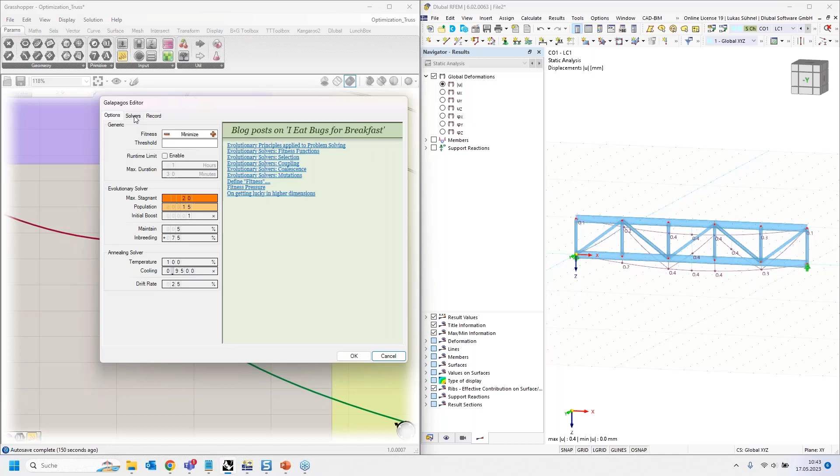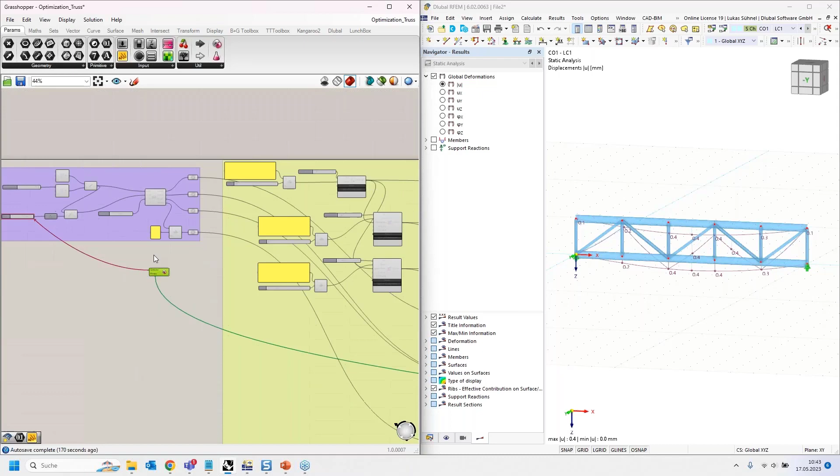I can run the solver, and one more piece of information. It is required to leave this Boolean toggle here on at true. We have to run it again and again, and this is what Galapagos will do. It will modify the height of the truss. That means the geometry will be modified. It will run the export again. It will hopefully be successful. It will run the calculation again, export the results again, and based on the new results, it will modify the input again, and so on. So this is the loop that I created, and I can run the calculation now.

I will just show it for a couple of seconds, or maybe a minute, just to show you that it's working, hopefully. So let's have a look what's happening. It should, in a couple of seconds, modify the height of the truss, and then run the export, the calculation, and so on.

So right now it's calculating the structure again, exporting the results, and now it should do the first modification of the height. Let's see, yeah, there you go. This is the first thing that it will do, set the height to, I don't know, maybe 0.5 meter or so, and then do it again and again. I will wait one more cycle of it.

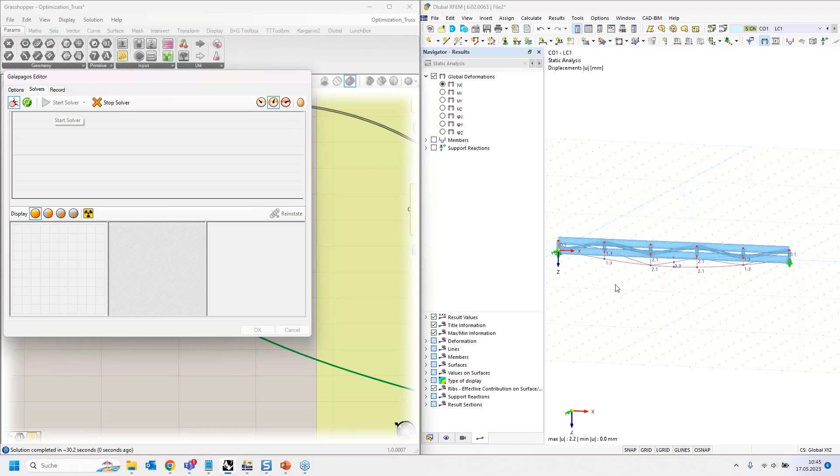Exporting results, and then modify the height again. Okay, I will stop it now. It will take a bit of time. What I did is I recorded it previously. Let me quickly show you. Should be, sorry, this small video.

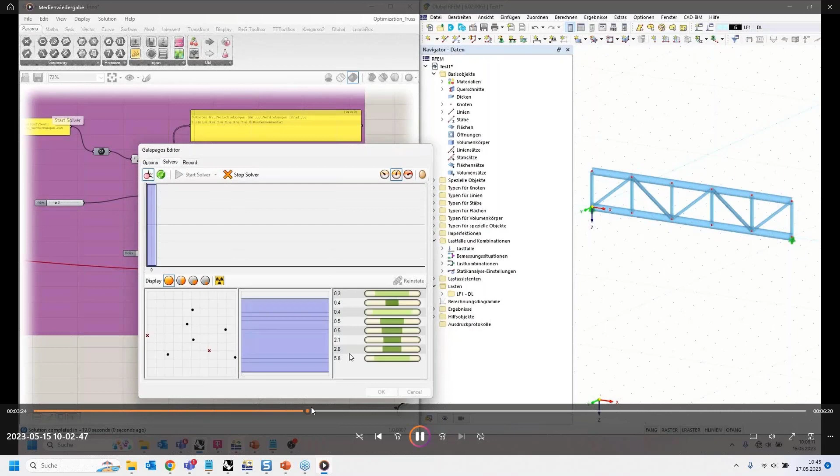Yeah, I started the calculation. And then the same happens that we just noticed. It will create multiple variants. And the result, I did not finish the calculation, I just skipped it at some point. You then get the variants as an option on the bottom right. And you can click on this variant and say, please

reinstate this specific situation. So you can click on this variant where the result was 0.3 millimeters and say, give me the input data from this variant, and then you can call up exactly this situation in Grasshopper and basically also in RFEM. Or if you say, I want for some reason the structure where it was 0.5 millimeter, then you can click on this one, say reinstate, and then you get the structure where it was 0.5 millimeter in the deformations.

So far regarding this chapter. Again, it's also quite new for us. We try to find better examples for it. And of course, it only makes sense if you can relate it also to the design in RFEM. So what we have now is we can link it only to, let's say, analytical results: internal forces, deformations. It would be even better if we can connect this automatic calculation to the design results of RFEM, steel design or timber design.

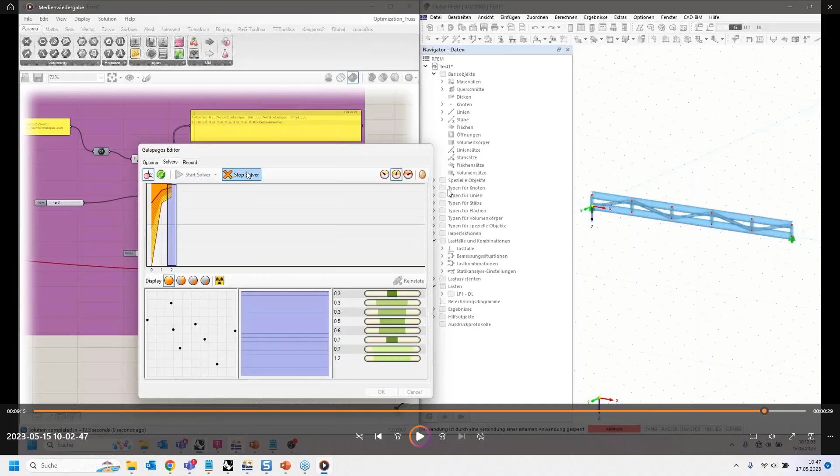But before we can do it, we have to extend our components a bit further. Where's my Grasshopper? Never mind. We have to extend the member components with the information about steel design: equivalent member method, equivalent lengths, the general method. We would have to allow the input of timber-related settings, and this is what we will do in the next weeks and months. And then I think this whole workflow makes even more sense.